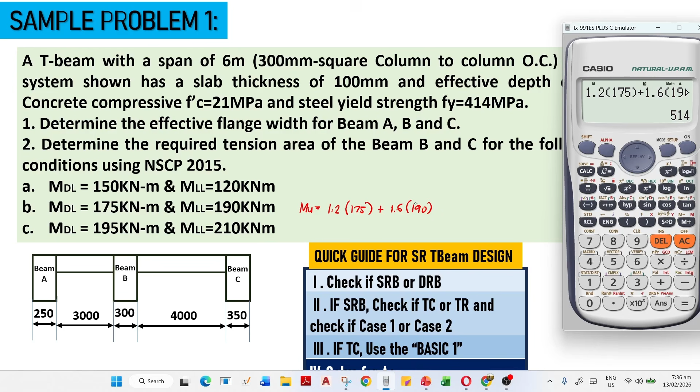Kilonewton meter. Now using the parameters F'C 21, Fy 414, effective depth of 470, slab thickness of 100. Kailangan nating i-design ito and then kunin ang effective flange width. Ito tayo sa next.

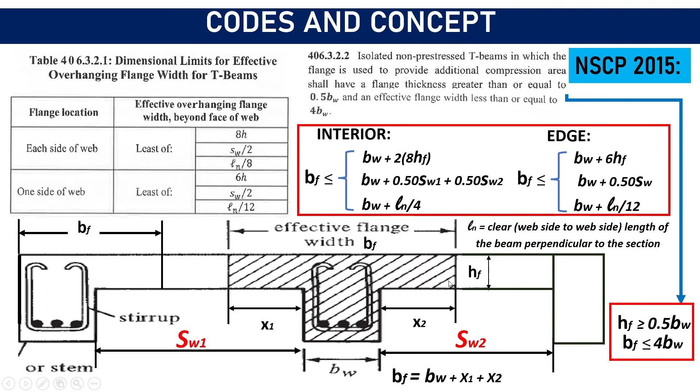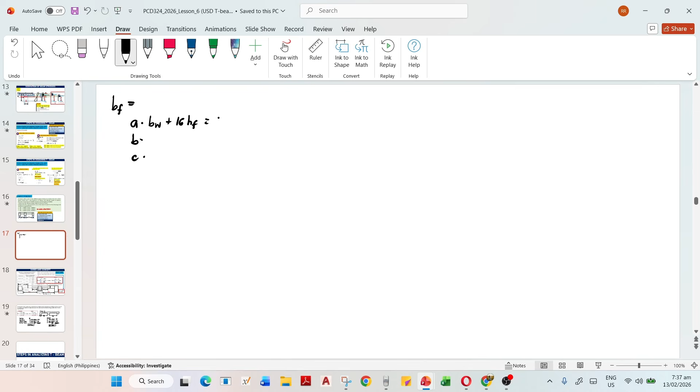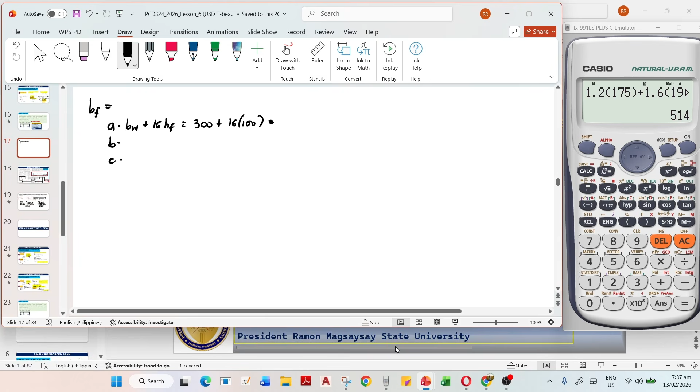Sabi doon, meron tayong beam B to design, 300, tsaka yung kanyang HF is 100. So, BW plus 16 HF: we have 300 plus 16 ng 100. Pwede pala tayong mag-dito para hindi na tayo labas ng labas, so alongside, lagay natin yung calculator natin dyan. 300 plus 1600, so we have 1900.

Next is BW plus SW, 0.5 SW1 plus 0.5 SW2. So we have 300 plus, sabi sa problem, sa diagram, we have clear distance sa adjacent beam na dalawa, yung isa 3,000 tsaka isa 4,000. Plus 0.5 ng 4,000. So 300 plus 0.5 ng 3,000, 1,500, plus 0.5 ng 4,000, 2,000, so we have 3,800 mm.

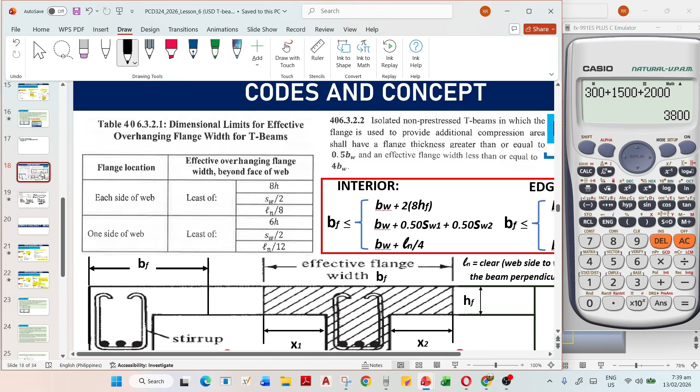Next, BW plus LN over 4: 300 plus LN. So this time, magko-compute tayo ng LN. Yung LN kasi is 6 meters and binanggit sa problem na naka-center to center ito o on center OC. So we will just subtract the half of the dimension ng square, ang half nun is 150 sa isang support and ang half naman is nasa kabila, so parang magma-minus ka lang ng 300 din. So 6,000 minus 300, 5,700, so ang LN natin this time is 5,700, divided by 4.

Sabi ko nga, kung hindi minention yung kanyang positioning, let it be to be your LN, pero dahil minention, i-subtract natin. So 5,700 over 4, we have 1,725 mm. So this time, ito yung ating nanalong BF. Palitan natin, so your BF is 1,725 mm.

So ngayon, pwede na tayo mag-design ng ating beam B using MU 514. Lagay lang natin lahat ng parameters: 514 kilonewton meter, HF 100 mm, F'C of 21 MPa, Fy of 414 MPa. Tapos, ano pa ba? Meron tayong okay na, so yan na yun.

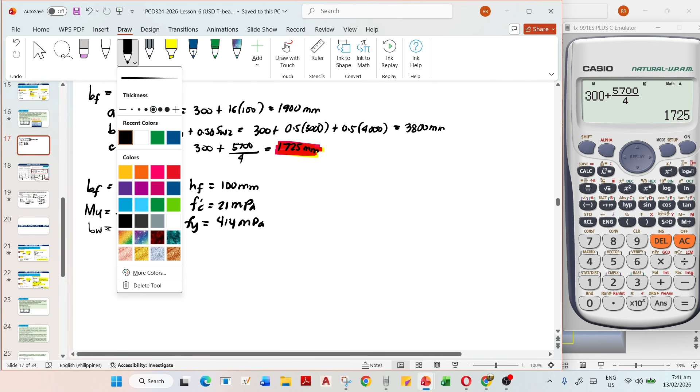So yun, then we have a quick guide na pwede natin itong gamitin, o pwede rin tayong mag-conceptualize gamit yung mga rectangular designs natin before. Hindi naman yan nagbabago, ang nagbago lang yung shape, so we can now adapt. So pwede tayong mag-check ng SRB or DRB at maximum condition.

So this is your step 1. At max condition, ano ang magiging MU max natin? Ano yung magiging MU max natin? Para yung MU natin na nakuha ay dapat i-compare sa MU max. At maximum condition, you can really say na SRB ba ito o DRB.

So, sabi natin, kapag yung MU natin na nakuha is greater than MU max, that would be DRB. If MU is less than MU max, that is SRB. Diyan mo lang masasabi, kailangan tayong makakuha ng MU at maximum condition.

Before, meron lang tayong formula na MU max, di ba? Reduction, tapos yung mahabang formula, 51 over... so that is for rectangular only. Kuha tayo in a general form, no?

Reduction, you will use the stress diagram to get the moment of a force, no? Kagaya ng yung CC natin. Okay, so if we have this, ito yung CC, ito yung T. Ito yung kanyang distance from yung couple distance niya.

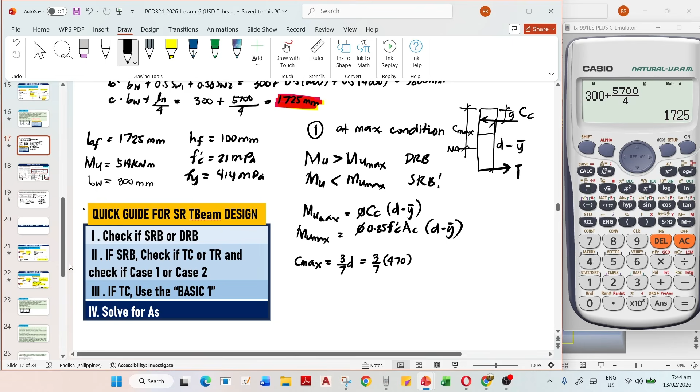Yan, sa stress diagram natin. So, Cmax, according to the formula, is 3/7 of D. So we have 3/7 ng 470. Given niya yan pala, no? Check natin, effective depth of 470. Okay, so and that would be 3/7 ng 470, at 201.429. Pwede natin siyang i-store sa C.

Next, kuha tayo ng Amax. So, Amax is beta 1 times Cmax, ganun din yun, at maximum condition nga lang. So if you multiply that C times 0.85, that would be 171.214. Store ko siya sa A.

Ngayon, check natin yung idea nung kanyang pagka-T-beam. Tignan natin. At maximum condition, T-beam kaya magpe-perform yung ating stress. Since nakakuha tayo ng Cmax, it will be measured from that, no, to the neutral axis. Ito yung Cmax, ibig sabihin, since 201.429 yan, ang HF natin is 100 only. Therefore, nagkaroon ka ng extra area dito sa part na to.

So meron tayong Z length dito, magkakaroon ka ngayon ng dalawang area. Magpe-perform siya as T-beam at maximum condition. To get the MU of that T-beam, kailangan mong i-validate muna saan pupwesto si compression force. Nasa centroid nung dalawang area na to.

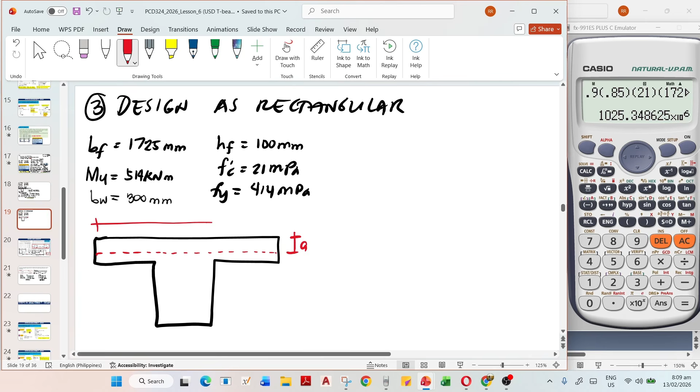Okay, this will be AS. Okay, so let's perform as rectangular.

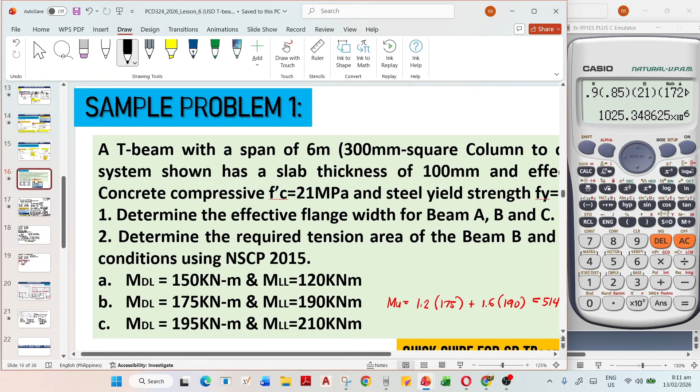So for Cc, we will say that is B area, or A times BF. So I can actually make this A, then BF. From that, you can get - let's solve the reduction first.

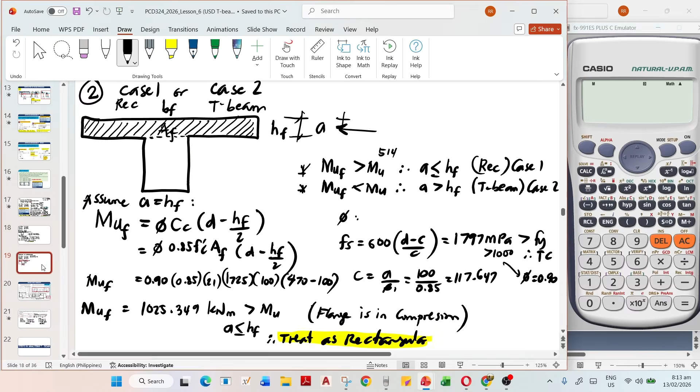56 divided by 0.85 - say you get C equal to 65. If that's the case, your FS won't get bigger. Look, if your A, which we checked earlier, equals your HF, and FS comes out to 1797, that would be greater than Fy, greater than 1,000. What more if it gets even smaller? And technically, since we declared A is less than H, that's possible.

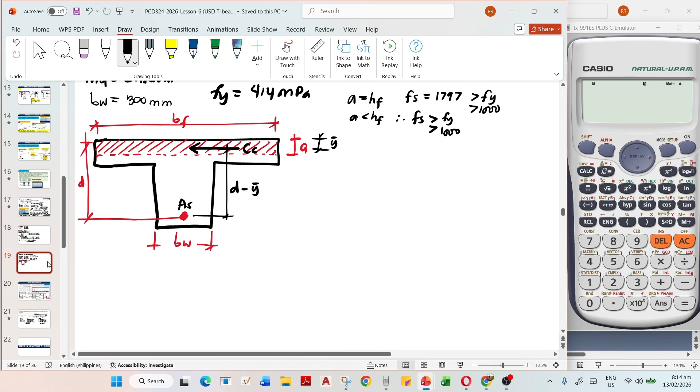So you can also confirm this. How? Using 514 times 10 raised to 6, use your actual MU. You will treat 0.9 as an assumption. You can use that - reduction as 0.9. Just assume it. You can use 0.9, then 0.85, then F prime C.

Then your A, and BF, 1725, then 470, then A over 2. Try it: 514 times 10 raised to 6, 0.9 - I was just guessing earlier - 0.85, then 21, then A, 1725, then 470, then X over 2.

Okay, shift solve, right? Your A at 514 is 41.28. Okay, so that is less than HF. Now you're sure. I was just guessing earlier, but it makes sense.

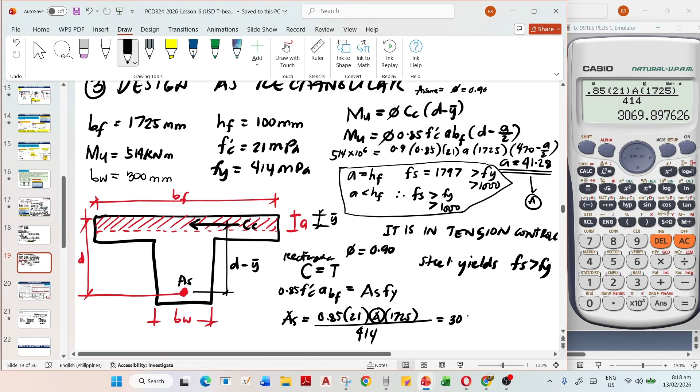21, then A, and then 1725 over 414. So we have 3,069.897. So your AS minimum, AS is 3069. Okay, so meron na tayong AS.

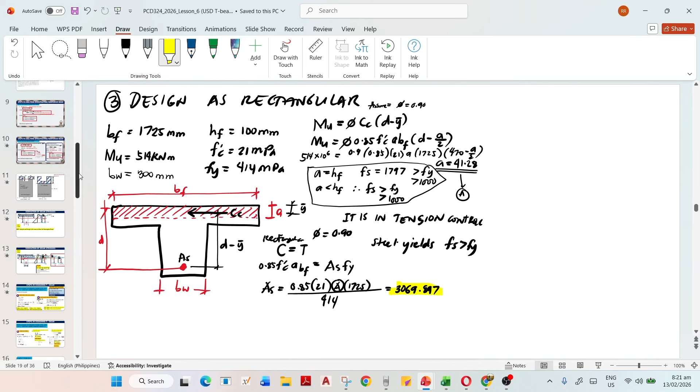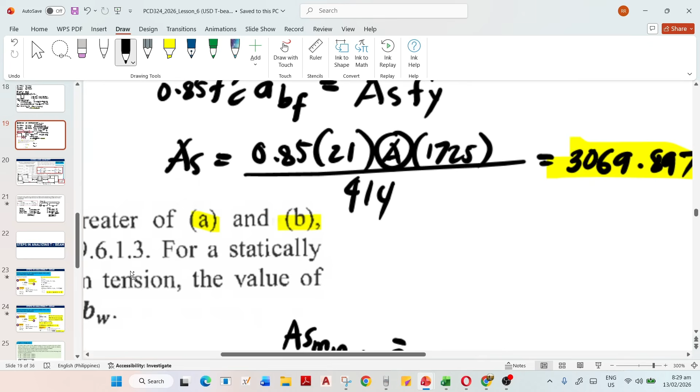Pero meron pang sinabi ang code actually. So tignan, meron tayong karagdagan sa code na sinabi yung AS minimum. I've discussed this last time sa isang section and we did this AS minimum comparison. May correction lang ako dun, hindi natin nabasa kasi masyado ito. Yung sinabi dito, for a statically determinate beam with a flange in tension, the value of BW shall be lesser of BF and 2BW.

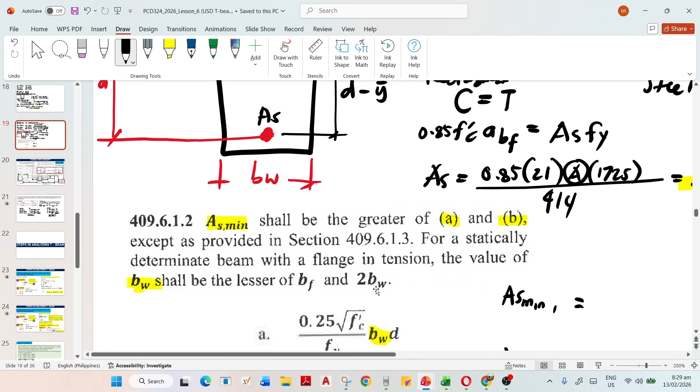Generally, meron talaga tayong AS minimum na BWD. Kung ano yung given na BW, actually yun. But gagamitin lang natin yon yung actual BW if in compression. The flange is in compression. Meaning to say, flange is in compression is you are in positive moment. Yung moment natin na dinedesign is positive moment.

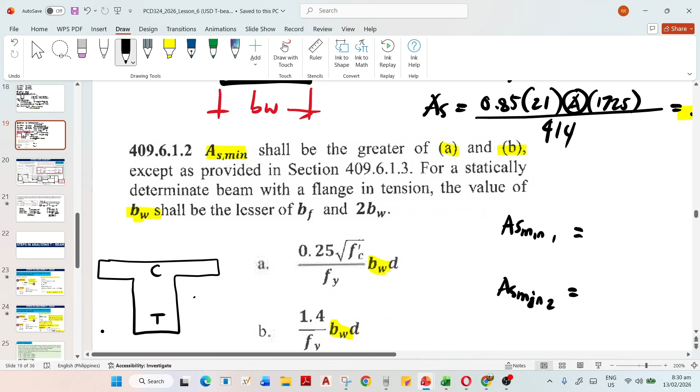Okay, so nagkakaroon tayo ng positive moment. Pag nagkakaroon tayo, natitension yung baba, nako-compress yung taas. Positive moment. Okay, so kung negative yan, baliktad. Tension na sa taas, compression sa baba. So nagkakaroon tayo ng flange in tension. So yung crackings natin, nagkakaroon dyan ng cracks.

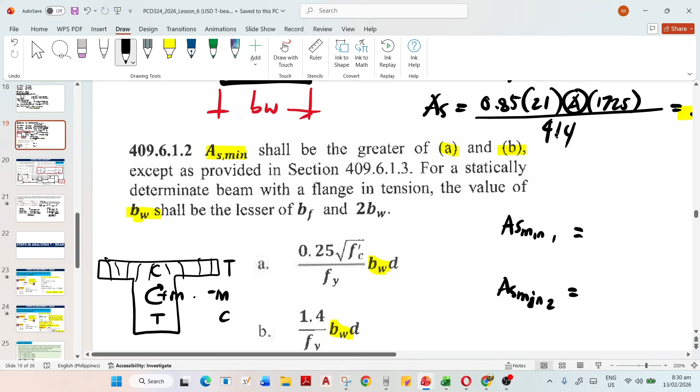So you will change the BW dito, shall be the lesser of BF and 2BW. So actually, kapag nakakuha ka na ng design mo na AS 3069.897, you will compare that to AS minimum. So since napatunayan natin na this is flange in compression, positive moment naman po siya as mentioned.

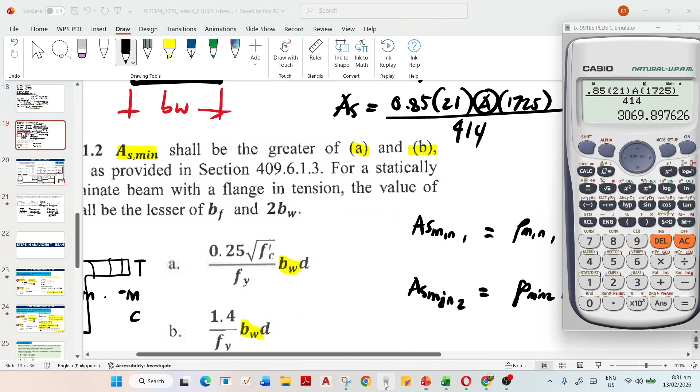So kunin natin yung rho minimum 1, yan lang yun yung rho minimum 1 diba? Square root of F prime C over 4Fy, that is rho minimum 1. And rho minimum 2, BWD. Gagamitin natin is BW. Ang BW natin is 300. So that is square root of F prime C over 4Fy.

Then BW, 300 times D, 470. So we have 390. Tapos yung AS minimum is 1.4. Palitan mo lang to ng 1.4. Tagalin natin yung isa. We have 476. And sabi niya, the greater of A and B. And this is the greater.

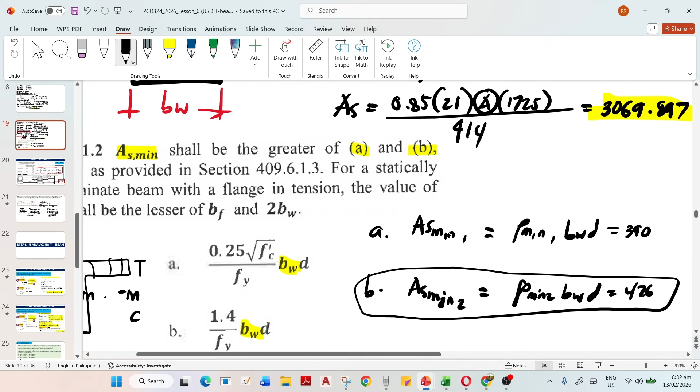Ibig sabihin, si 476 ang i-compare mo sa AS natin. Pero since your AS is greater than AS minimum, yan yun ito yung AS minimum ko. Since AS is greater than AS minimum, therefore, okay. So you will use AS pa rin. Hindi ka na magko-compare ng rho.

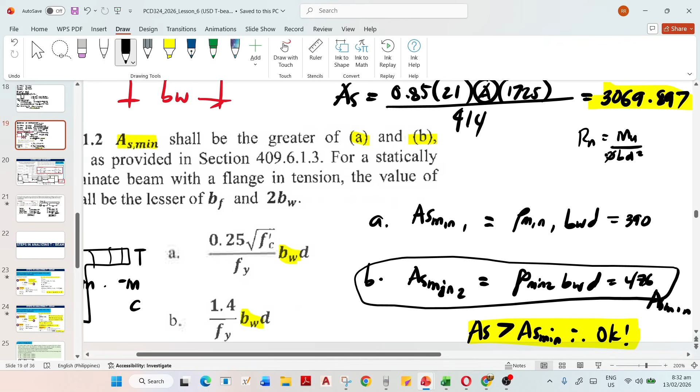Kung sakali man na gumamit ka nung rectangular basic one natin na yung may Rn, di ba, nanguha ka ng Rn, pwede rin naman to eh. Using mu over reduction BD squared. Basta lang napatunayan mo ha na yung reduction is tension control, 0.9. Hindi ka kagad pwedeng dumiretso dito ha, titignan mo muna kung yung nag-yield ba yung Fy mo. So you will use this one, reduction, and then kuha ka ng rho.

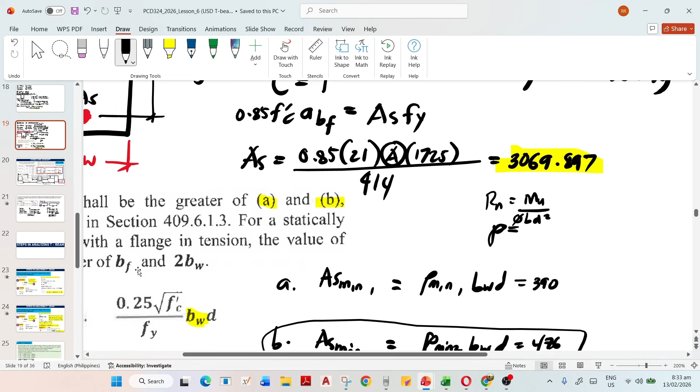Yan, di ba kuha ka ng rho dyan? Yung formula mahaba, hindi mo na kailangan i-compare sa rho min. We'll use that, doon tayo mag-compare sa AS min. So ngayon, kapag in tension nga daw, si BF, 2BW, kunin natin.

So yung BW mo shall be the lesser of. So kung ang BF is 1725 dito, since, then yung 2 times 300 na BW is 600. Sabi niya, the lesser of. So mas maliit si 600, ibig sabihin yun yung magiging BW mo dito.

Kunwari lang ha, nasa tension yung gagawin natin. So that would be 0.25 times square root of 21 all over 414 times 600, yun yung nag-win dito eh sa condition, times 470.

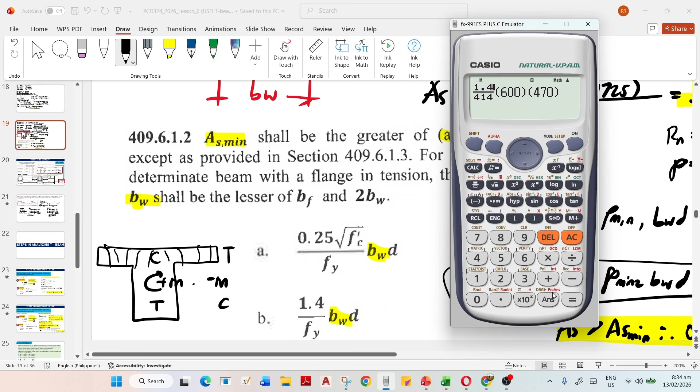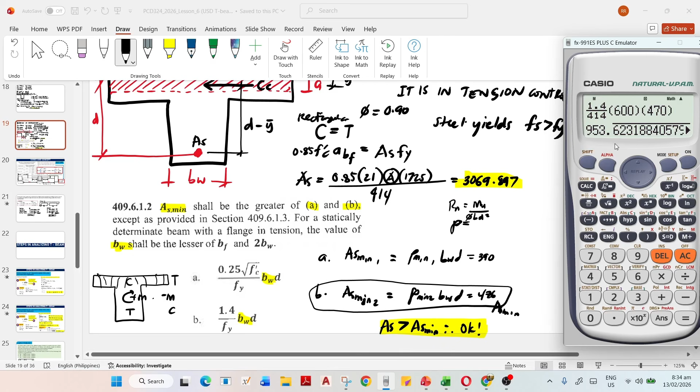780 na siya. Kapag naman 1.4 Fy, okay, 953, so lumalaki, no. So yan yung kung sakali na flange in tension, yan yung nag-win. Pero dahil yung AS natin is greater than pa rin doon, so yun pa rin ang AS natin. So yan lang yung karagdagan natin sa code requirement.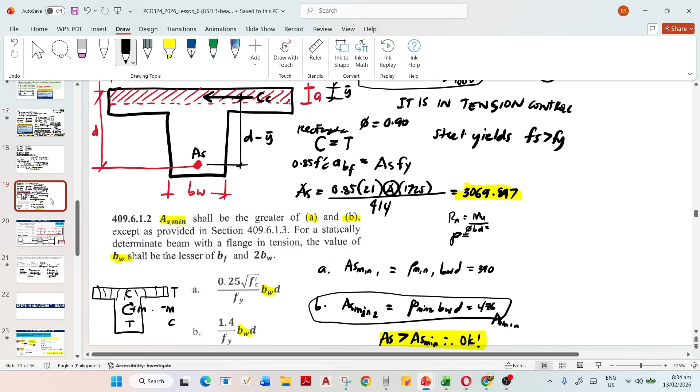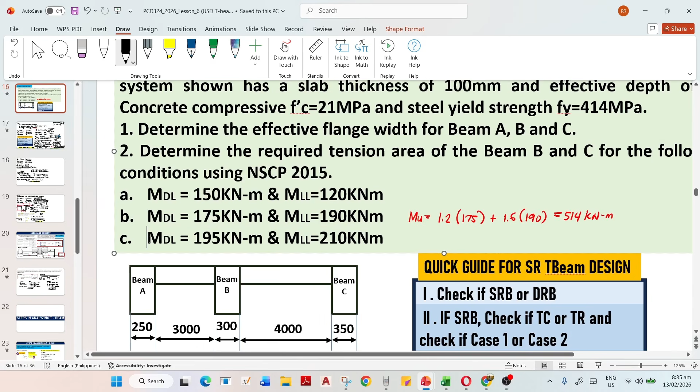But the whole process of designing T-beam is in this lecture. So that would be problem number 2, using this one. So try nyo naman kung ang moment natin ay lumaking ganito. So actually, yung pagkuha ng MU max sa step, same pa rin. Compare mo lang yung MU mo na yon doon sa makukuha mo dito. And later on, baka magbago na yung case, baka hindi na siya rectangular, check nyo na.

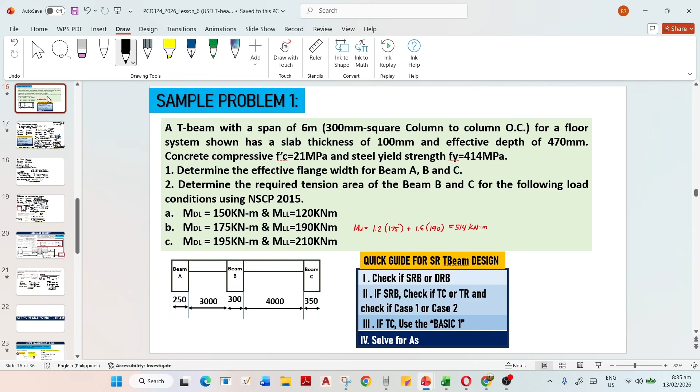So paano kung nag-T-beam na siya? So tignan natin, okay, practice in your home po. And then try nyo rin din kunin yung tension steel area nung beam C sa moment na to. Okay, so that would be your lab task and to be submitted on Monday. Thank you po.